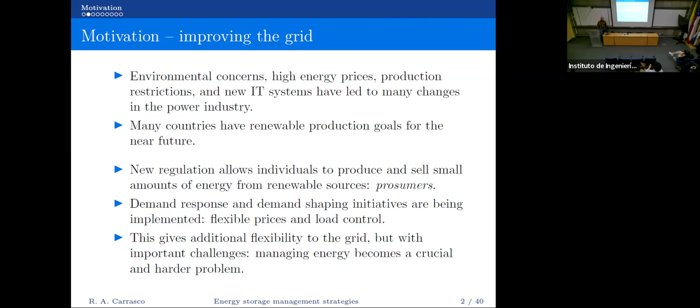Okay. So the main motivation of this was basically how solar energy has been an important part, especially in Chile. We have a lot of generation here, and we have a bunch of things that are interesting in this setting. In particular, power management is an important part of what you want to do with this, but you have this uncertainty in generation, so there are several questions that you want to address in this setting. Many countries have some goals in terms of how to put solar into their systems, and how this adds flexibility, but also has a cost around it, especially in terms of the variability of generation you get with it.

So further north, you have much cleaner air, and you have a higher ratio of radiation you get there. So actually in Chile, it makes sense in many applications to have what's called a guiding system for the solar panel, something that's following the sun, which doesn't make a lot of sense, for example, in Germany, because the amount of energy you get is so low, you will spend more money doing the guiding than the extra that you get. In Chile, if I recall correctly, it goes from 21 to around 30% of plant factor with guiding. So it's a lot of improvement with that.

So it grows significantly. By 2021, we already have in Chile 3,700 megawatts of solar capacity installed. And if you go to the website of the Ministry of Energy, you will find that there are actually 166 other projects that have been developed in 2022, just this year. So we're going to increase the amount of solar energy we have. Of course, the problem with solar is that.

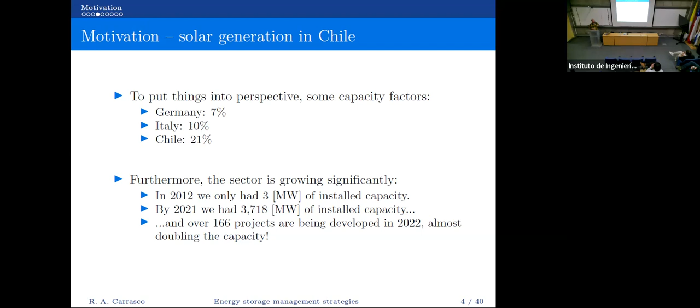So the other thing is, one of the main moments when you want to use electricity is when you don't have sun. You want to turn on the lights, and that's an important issue there. You won't be able to generate anything at that time.

So one of the things that could solve this problem is having some storage. Of course, storage right now is a little bit out of the question because of its cost, but as you can see, prices are going down really steeply. All this electromobility has improved the number of plants working with this sort of thing, so the cost has been going down significantly.

Today, storage is not just seen as something you'd put for resilience, something you use as a UPS for your computer. Now people think of it as a system you can use for sending energy into the system during normal operation. So it's going into that range right now.

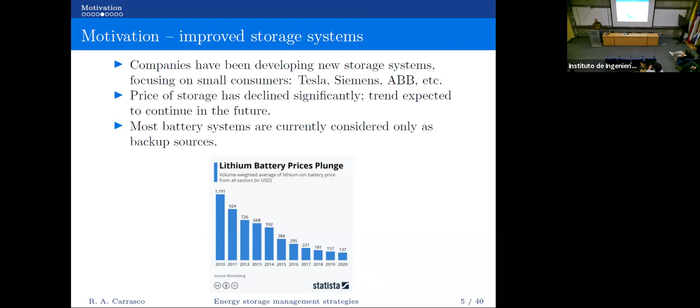That is an important thing. But the problem is that when you add storage into this, you add extra questions of how to use that storage, and that's what we're thinking of.

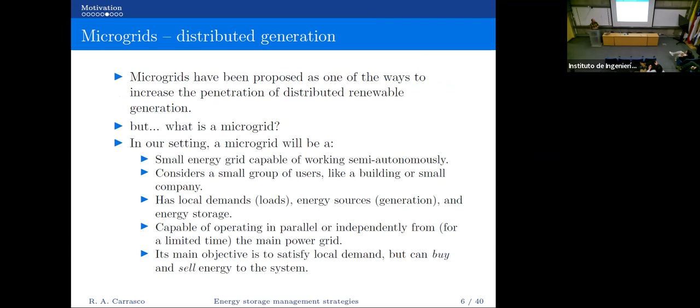In the particular setting we're looking at is distributed generation, where you have microgrids. You have a small grid with maybe one house, maybe a couple of houses. You have their generation and some storage to store the energy and move things around a little bit. So it's a small system, not a huge integrated thing, but you have some connection with the main grid.

So you have a small thing with storage with variable generation, not just variable but intermittent generation as well, which is solar. Solar has two things: you have variability during the day, and you also have intermittence, like when a cloud goes by and you stop having energy. So it's not just that it varies throughout the day, it also has intermittence.

The idea of this grid is to satisfy the local demand of this small thing, using the grid as a backup. So if you don't have enough energy, you get it from there. If you have too much energy, maybe you can send it there and sell it.

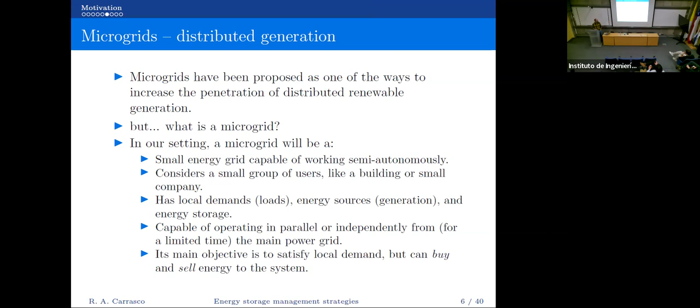That's something you actually can do here in Chile right now, since 2012 if I recall correctly. With net billing, the law we had at the time, you can actually sell your excess energy with certain limits in capacity. You'll be able to do that.

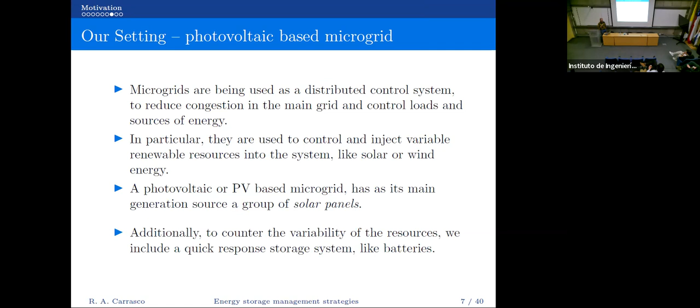So in our case, we're going to be talking about a photovoltaic solar microgrid. Your generation is going to be based on solar panels, and you will have some sort of storage, maybe lithium batteries, lead batteries, or something like that. So we'll have that as a system that allows us to give a quick response. Batteries are really fast to give you and store energy. So we'll have that.

So what happens when you don't have storage? If you don't have storage, basically the decision is pretty easy. If you have enough energy, you give it to whatever demand you have. If you don't have enough, you'll have to get something from the network. And if you have more than enough, you can send it there. That's basically all your decisions. There's nothing more you can do about it.

The moment you have storage in the system, now the questions start to complicate a little bit, because now if I have some extra energy, what should I do with it? Should I store it? Should I sell it to the system?

Furthermore, if I have some sort of information about what will happen tomorrow—say it's going to be a really cloudy day—well, maybe it makes sense to actually store more today and not use most of it today, because I'm going to be using it tomorrow. Maybe my demand, the load I'm serving with this energy, is going to need that amount of energy in the afternoon.

So I'll store this the whole day and use it tomorrow. So those type of questions start appearing. When should I store? When should I sell? Should I sell the energy I have in the battery?

You also have some sort of losses within the battery. It's not a perfect system, so you have losses throughout the day. You also have a loss between putting energy into the system and getting it out. So does it make sense or not to actually do it? That's the question we try to address with this.

The idea was to develop a model for this small PV microgrid, include the storage capacity, see how we're going to deal with it, and somehow deal with the stochasticity of having variable energy and variable demand inside. How can we make good decisions in terms of what to do with the energy to maximize the economical benefits for whoever is using this?

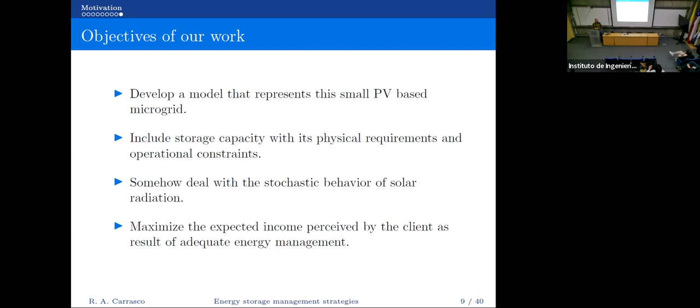Any questions so far?

Good. So I'll go a little bit into the background of what stochastic optimization is, in case somebody doesn't know that.

How do we do that? If you study stochastic optimization at some point, there's a very nice problem called the farmer's problem. I don't know if you know it. Basically, the problem is saying, you know what?

Think of the farmer that has a piece of land. He or she wants to plant certain types of products, but doesn't actually know what's going to be the yield of each of the different areas.

So what decision do you take first, given that you have some requirements afterwards for whatever crops you're planting? Your first decision is going to be how much of this area I'm going to be planting with different types of plants. And then my second stage decision, once the realization occurs, things grow, and you have a certain amount of tons of the different products you actually get from the land.

Then you have to decide something. Maybe you have more than you thought, and you will have to go and sell it. Maybe you have less, and you have to go to the market and buy it. So that's going to be your second stage decision.

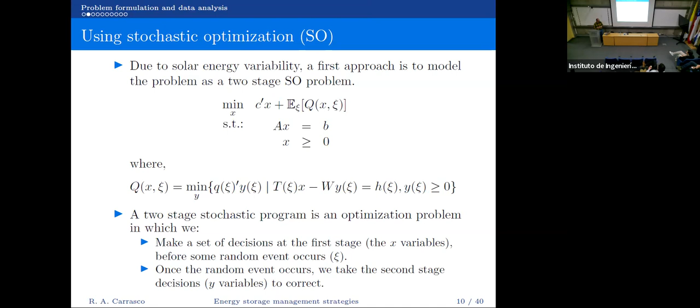So that's basically the setting we want to use, and try to see how we can actually put this problem into that setting.

That's going to be my generation. It's uncertain. That's going to be my demand. I don't know how people are going to be using the electricity throughout the day. So those are my main sources of uncertainty.

But if I want to buy or sell anything from the grid, maybe I know how much I can get, or maybe I have some information about what the battery is going to have. So I have information about how much to get in or out of that.

So the first thing we said is, well, let's try to simplify the difficulty of this. Let's go with that, and let's change a house for maybe a farm.

In farms, it's pretty easy to predict the demand. Basically, most of the things are like pumps. When pumps turn on, turn off. So that's a fairly easy thing to deal with. Now you have your demand, some more known one.

I'll show you at the end what we do with the other setting, which was the one we were interested in. But for the time being, let's say I know the demand. So I have these nice curves there.

Well, still I have all these yellow arrows over there, and I would love to have that. But if I do that, and I say I'm going to get this amount of energy from the solar panel, here's an equation that's not going to balance.

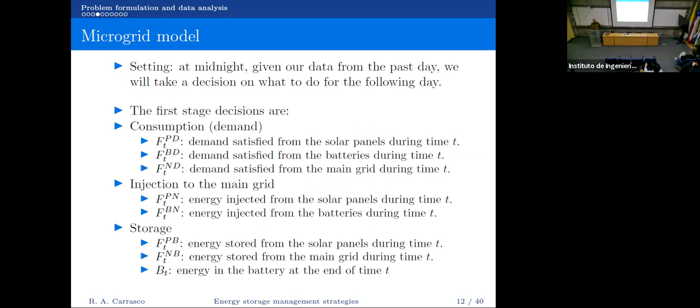Since I'm not touching this guy with the yellow lines, the state of the battery is not going to change throughout the day. So whatever I wrote that's going to happen is going to happen. That's the modeling trick we did for dealing with this.

Okay, so additional things we were asking: you can have variable prices throughout the day. You have some selling price, a buying price, a maximum capacity of the battery, some sort of capacity of flow inside and outside of the battery. So you also have the limits.

My second stage, as I said, will have this generation being stochastic. And my second stage will have a deficit or a surplus of energy that I'm going to be dealing with by connecting it to the network. That's going to be for each scenario you might think of happening tomorrow. I'll be doing these sort of things with the network, which is a sort of infinite amount of energy I can get or put in there within the context of what I have as a microgrid.

Okay, so pretty easy equations. If you see the model, it's called a DC model, right? So we see everything as a simple DC model. Since we have a small microgrid, you don't need to deal with the Kirchhoff laws and all those sort of things that you need when you do alternate current models.

So you have that from the demand point of view. You want to make sure that whatever you get from the panel, from the grid, or from the batteries satisfies your demand. This is going to give us how much energy we can put into the batteries, limited by whatever rate you can charge the battery. Whatever rate you can discharge the battery, you can get energy out of it, right? So it also has a limit.

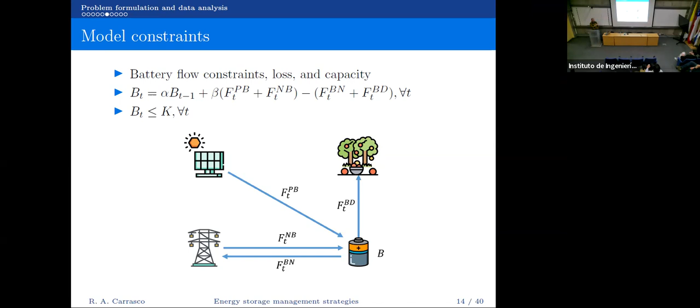Pretty simple model. If you think of those tricks I showed you before, now the model is relatively simple until we get to this equation, right? Where we say, okay, I want to make sure that all these flows somehow are linked with this thing here, right? So I create these two second stage variables, our Z's that are there from this surplus, and I use those as a measure to deal with this different scenario.

So I'm going to divide the world into different scenarios that you have as a second stage, right? Which is now, that's why I have an S on top. And that will tell me one of the millions of scenarios I might have of solar energy tomorrow. Remember, for me, a scenario is the whole day of generation. It's not going to be just one hour. It's actually the whole curve of that generation for the whole day. So I can have thousands of those, right? And this thing is going to be balanced in the second stage by using those Z's.

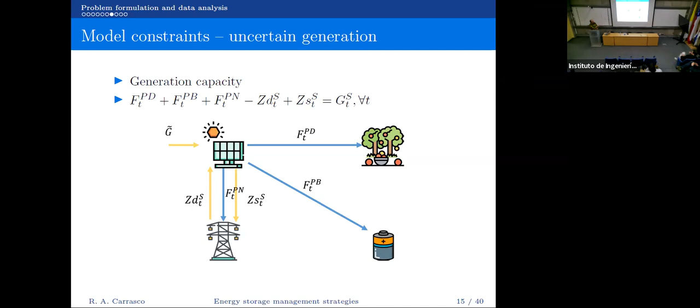Okay, and that's going to be my cost function. There I have the variable cost that you were asking for, right? It's going to be up there. So we have a variable price, maybe a variable selling price also could be there. And since I want to minimize some sort of expected cost, I'm going to give some probability to each of the different scenarios and just multiply that by the cost. That would give me the expected value of this thing.

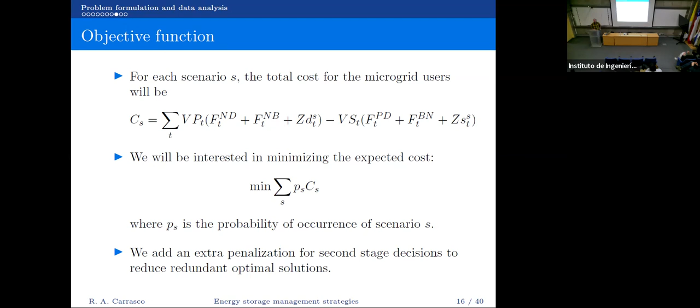Okay, so we have to deal a little bit with some penalization, some things I'm hiding under the carpet right here to make sure that multiple solutions are condensed into just one. Some technical things we can talk about afterwards if you want to know a little bit, but the general idea of the model is the other one I showed before.

How do we create those scenarios? So in the general sense, we want to have, for each of these curves of generation that we have, some first stage decisions that when written in stone, we cannot do anything about them. We'll have the world divided into many different scenarios that give us some curves in terms of generation, and some second stage that kind of decides, if you have so much sun, you'll do this or that, right?

With these second stage variables right there. So you can have a bunch of different scenarios. One way, of course, of doing it is what I said at the beginning, right? You can think of having some historical data and try to use some machine learning tools to build those scenarios.

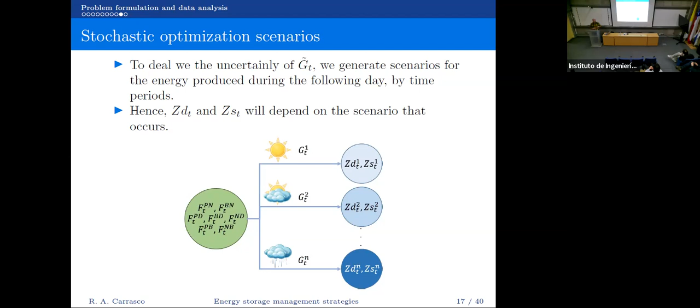So that's the first idea we had a couple of years ago with some undergrad students. It was Isabel Bebe and Slavia Volkovic. Both of them started working on this. So we grabbed, I think it was 10 years, 10 years of solar data that we got from Chile. And we took that information and started to see if we could cluster things throughout the year. They were using, in this case, K-means, a very simple machine learning technique for doing clustering.

So we can think of that as our clustering and use that as a scenario, which is interesting because we went from having 400 and something scenarios of sun to clustering into these little groups, right? So we only have 3 scenarios maybe that we can use. So that's the first thing that was interesting. The real data is fairly stable, how you see the sun going from one day to the other.

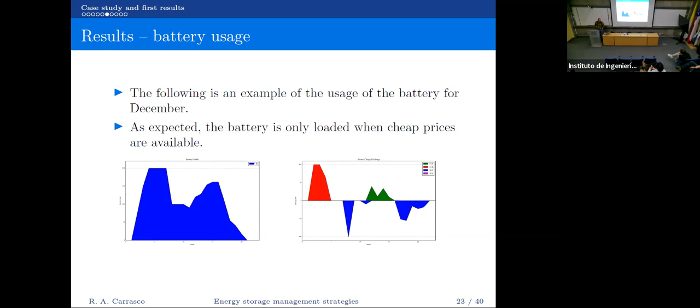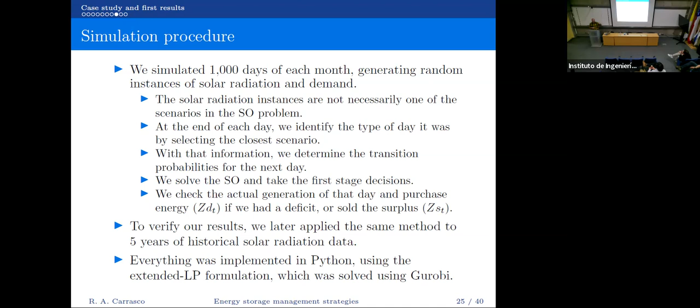And here are some curves with the different scenarios. Everything sounds pretty nice, so we said, okay, this sounds promising. So we simulated many different out-of-sample cases using the same policy to see what happens, and we compared ourselves with what people are doing right now on inverters.

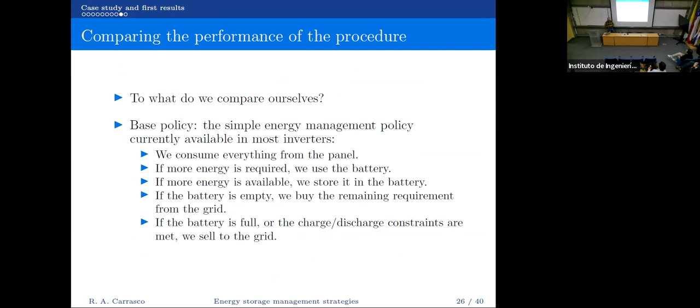Inverters, basically what I said before: if you have extra energy, you will store it in the battery until it's full, then you'll sell if you have too much. If you don't have enough, you'll get it first from the battery and then from the network, and that's going to be it, right? That's what inverters right now do. So we compare with that, that's our first result, right?

If you compare to that, we get around 11% reduction in cost of this thing working, right? So that's already an impressive thing that you can do. You can reduce the cost of functioning this thing around 10%. You have big bars, especially during sunny days, right? So during our summer, you have a larger variance of the decision you can make. In winter, you have much less energy. The reason of this variability is basically because you have much more energy here than you have here.

So that's basically that. Are the savings only for operations or also considering investments in battery? Only operation. So we're comparing: I have a microgrid with storage, and I just do whatever the inverter is telling me to do. And on the other hand, I have batteries and I have my solar panels, and I'll be doing whatever this optimization model tells me. Now, in both cases, I already invested in the solar panels and the battery. So I'm comparing just operational costs.

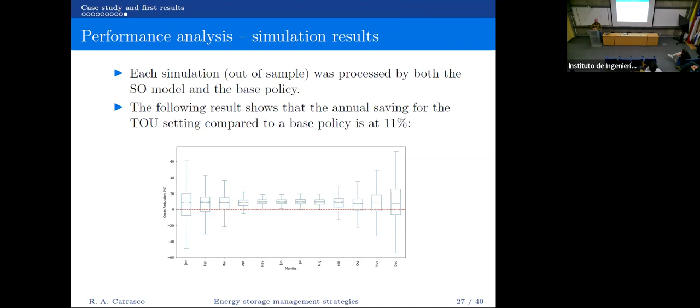Okay, so that was one part. And I was telling you, well, what if we predict and optimize, right? Maybe we can actually not do this thing of trying to get the scenarios first and then see how to use them. Because one of the things that we realize here is, sure, I have all this 10 years of data. I'm good to do the clustering, but that clustering doesn't really care how I'm using it afterwards, right? It's just seeing what things look similar to what other things.

But once you start applying them, you realize that, well, if I have a little or a lot of extra energy, that's going to make the same decision at the end. If I have extra energy, I'll store it in the battery, for example, right? So it doesn't really matter if I have a little or a lot of extra energy, my decision is going to be the same. So maybe two scenarios are really close to each other, but one is extra energy and the other one is less energy; those are two different decisions, even though they're close by, right? So maybe just clustering things by how geometrically close they are might not be a good idea if I'm going to be using this afterwards to actually make decisions.

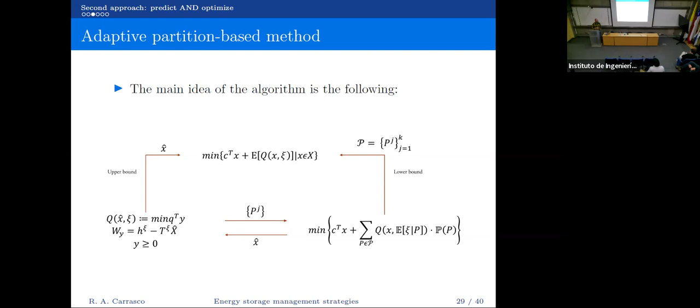And you can interpret that solution at the end as, wow, those are the scenarios that should be considered from the start, right? Because I use those in this two-stage optimization problem and actually get the same solution as the original with all the scenarios I wanted to have.

As I said before, one of the tricks in most of these decomposition algorithms is to find an auxiliary problem that's actually easy to solve. If you had to run Gurobi or whatever you're using every time, it's going to be super, super expensive. Turns out that in our problem, since we made this decision on how to model the problem, the second stage problem is just an algebraic problem.

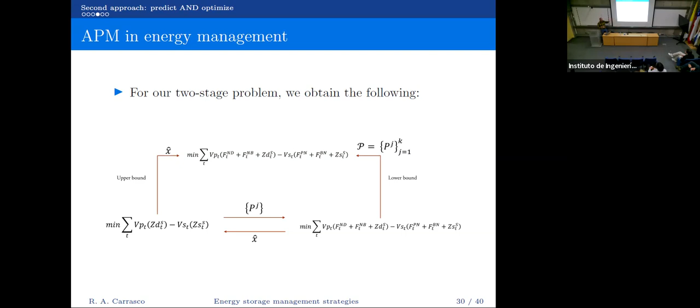We just see if the demand is higher or lower than whatever we have there. And the dual variable is actually the selling price or the buying price. So it's super easy to compute the second stage decisions and see how to group them. That's really fast to do. We could actually do it in a Raspberry Pi in a few seconds, and you can solve the optimization problem as well.

And it turns out that you gain a little bit. It's not a huge improvement, but you get around 1-2% extra improvement in your cost by just using these scenarios instead of doing k-means. You end up with a more robust way of seeing the actual scenarios you need to take care of, and use that in your optimization program.

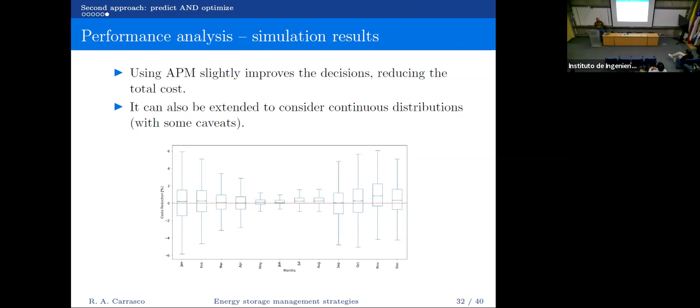The good thing as well is that you can grab those scenarios and put them in your optimization model, and run it in a Raspberry Pi. It's an LP, so it's pretty easy to model and solve. You cannot run Gurobi in a Raspberry Pi because of the processor; it needs Intel, so we actually used GLPK for solving it. It was pretty easy to do. So that was the thing.

I'm going to complicate things a little more in the 10 minutes that we have, and that's the question that you had, right? Now demand is uncertain. What do you do with it? And this was the central part of the FONDEF project we had.

This was done with Tito Homem-de-Mello from the business school at Adolfo Ibáñez, Gonzalo Ruz from the engineering school at Adolfo Ibáñez, and Carlos Silva, also in the engineering school at Adolfo Ibáñez. So basically the idea here was, maybe you can use machine learning tools to do the prediction part.

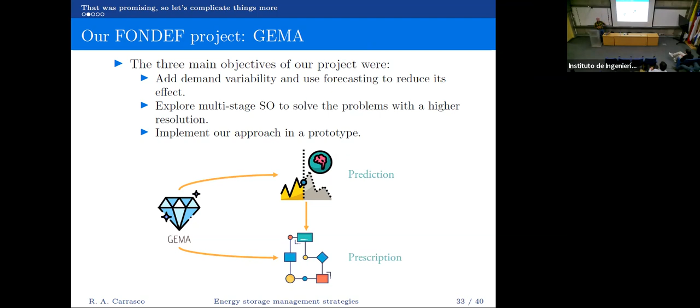And with that prediction part, we have some sort of idea of how things are going to go into the future in terms of demand and solar radiation, and then use the prescription to do this. And that was our FONDEF project with Gonzalo. We did several techniques. I'm not going to go into details on how to predict both demand and solar radiation.

Right? And now you can think of the error in your prediction as the stochastic part of your optimization model. And since you're thinking of the prediction as the error, you can separate the error that you have throughout the day. So it's independent one hour from the other one. So you're doing predictions in each of the different hours. And the cool thing with that is you can actually use some other decomposition algorithms to solve the optimization problem, which is SDDP, the stochastic dual dynamic programming we used for that.

Francisco Jara was also in the project, I forgot about him. And he was the one that actually did all the work. So that was very bad on my part, forgetting his name. Francisco actually was the one that solved this as a multi-stage stochastic optimization problem using SDDP to actually connect the prediction part with the decisions that we were taking.

And you can also implement it. We have an implementation of this in a real plant that we have in Cauquenes. So we have a bunch of batteries running over there. I can access it from my computer and send solutions of our optimization problem to actually make it work and use that thing. And here you have the improvements as well.

We have around 6-7% of improvement in terms of cost with real data. These Victron Energy inverters had that policy of just, whatever you have extra, you store it. If you don't have enough, you get it from the network. And we compared that to what the optimization problem was telling us, and we improved around 6% the cost of the usage of the energy. So that was the implementation.

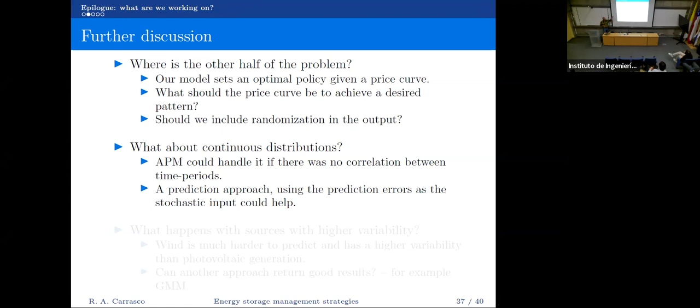And for my last minutes before the questions, we still have a bunch of open questions in this, right? If we have variable prices and they're stochastic, how can we put them in? Also, continuous distributions. One of the cool things about APM is it can deal with continuous distributions. Right now we have everything clustered into these 48 time steps, but why 48? Like Jocelyn was saying, you could have much better resolution. If you're using wind, you might be interested in having every 10 minutes or less, or even continuous. And APM can deal with that. There's a bunch of technical difficulties for doing that, but that's one way of analyzing this.

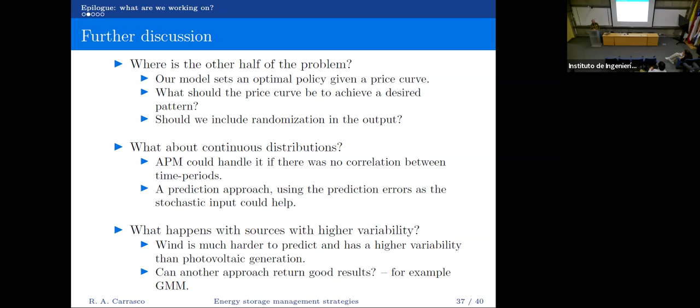And also, as I said, what happens when you have higher variability? Sun is not that terrible. You have other things like wind, which are much more complicated. So maybe you can use GMM as a technique to model this, as a possible way of modeling uncertainty and put it back into the optimization problem. And in terms of what we're doing now, we're implementing the optimization problem in the cloud, using Amazon Web Services, solving it there and sending the solution only.

And then also Cesar, a master's student working with me. We're trying to see if we can actually model the battery. If you deplete it and charge it very often, you will reduce the life of that battery. Maybe you can put that into your model and reduce the amount of getting in and getting out that you're doing to improve that life. How can you model that? We're doing that with Cesar.

And also, consider other objective functions. Maybe you're risk averse. You want to make sure that your battery is at least 70% full all the time, because if you have a shutdown, you will want to have energy there.

We are not very used to that in Chile anymore. When we were little, here in Chile, we were used to having blackouts. Now we don't have those. I think the first one was like a month ago. My kids, I remember, were like, "What's happening?" And it's like, wow, this was common when we were kids. But for them, electricity always comes out of the plug. There's nothing that can cut it.

But anyway, maybe in certain rural areas you might want to have the battery charged all the time or something like that. And also integrate rare events into solar prediction, like really bad weather. We're working on that in this Climat AmSud project with Uruguay and France, to see how to model climate problems. And that's it.